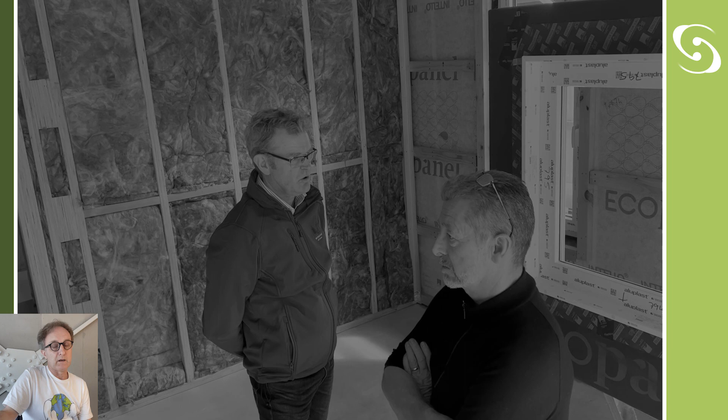The thing about the New Zealand home building industry is that most people decide what sort of home they're going to live in after visiting a building company show home. 80% actually decide what they're going to build. But in actual fact, they're looking at the wrong thing. They're looking at the cheapest possible home that you can build to the New Zealand Building Code standard. In most cases, they're all pretty similar. They might look different on the surface, but in terms of technical performance, they're very similar. And like I said, 95% of homes are built to the code.

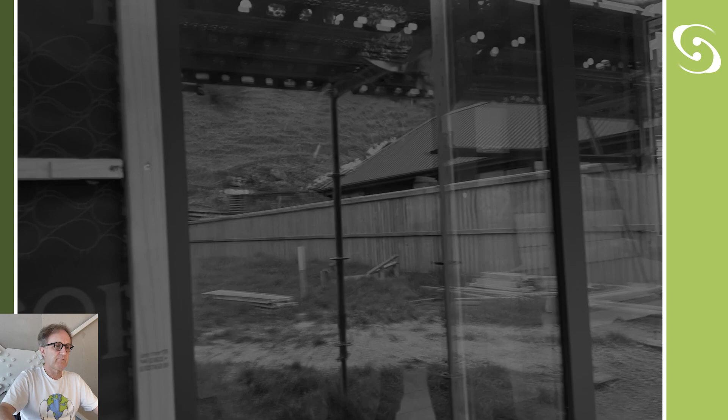So on the tours, people can experience not just the look and feel, they can see how warm the homes are, the air quality, the quality of light, the acoustics, all these things that you just don't get from looking at something on a website. That's the beauty of the tours. They can also hear directly from the homeowners and the people involved in creating the homes, the designers and builders, and ask important questions like the process of creating a super home, what it's like to live in, what's the power bill. People are really open and honest and share all their information about those things and the costs involved in creating a super home.

One thing most people probably initially think is: super home, that sounds really expensive. Supercar, super yacht. But that's not what it's about. It's about raising the standard and shifting the bottom end to something that is healthy as the minimum standard. I'll talk a bit more about our base, better, best standards. If you're on a budget, base is the minimum, and then you can do better or best if you want to go to the next step.

You choose which homes you want to visit and rock up. So there was one year, 2020, we couldn't do the tours because of COVID, but 2021, 2022, we had a different format. It was just back to one weekend, but we still had around 5,000 people. And it just shows how many people are actually interested in doing something different and doing something better. And it's been really super great to get back to having in-person events.

But also there might be different layers, and I think the Japanese call it kyokai, a technique for articulating space and understanding boundaries, and the boundary between the inside and the outside is something that you might want to occasionally blur, and there will be different levels of opacity and transparency. There'll be light and shadow, and a lot more than just how do you keep the weather out of the building.

And I think this design here reflects that a little bit, and this end room was really about how do we create almost like an outdoor room where there's an amazing view here. So that's another thing, you might want to see what's happening, so that the house opens up and closes down in varying degrees. Another interesting thing here is that you've got different layers of shading. So you've got basically a dual eave where you've got a lower overhang to protect this area from overheating, which I think is super important.

And this example here too, it has massive overhangs on the north-facing roof, because we think it's actually relatively easy to make a house warm so that it's not going to be too cold, but it's more difficult to keep it from overheating. So that's a feature of super homes, making sure that you have the right amount of shading.

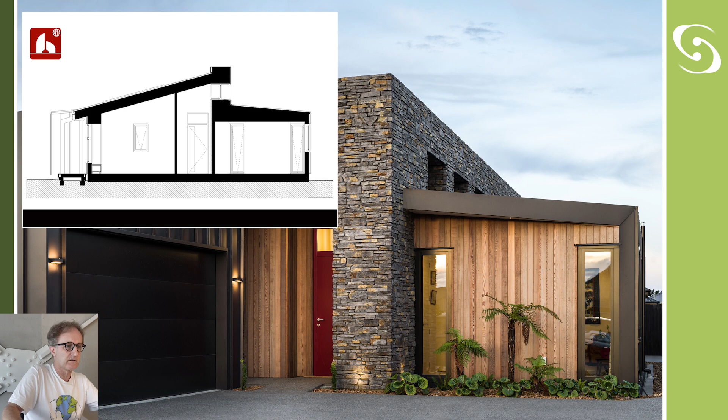house. Every design needs a big idea, and the big idea with this project was this spine wall that separates the public area from the private area. The bedrooms are on one side, and then the kitchen, dining, living, and a multifunction room on the other side.

So a key to the success of this design is a really spatially aware floor plan. It's a really good place to start, thinking about being spatially efficient, because, quality not quantity, if you can create something that's really great that isn't overly large, then you can put more into the quality with the money that you save.

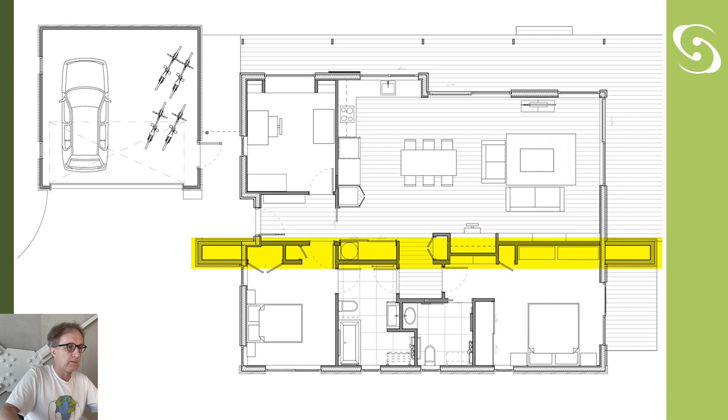So you can see this wall in the middle houses some storage and a little office space, but also it has the whole home ventilation system and the ducting and the hot water cylinder. So we've got our 2 bedrooms, master bedroom, ensuite, and a shared bathroom, and then opening out to the northwest is the living area.

And this is how the cross section works. So you've got these high level windows for ventilation, and there's Jetstream Max insulation in there, so we've packed as much insulation in there as we possibly can. And this house is designed to passive house standard, so it's very airtight. They tested it and it was 0.7 air changes. The requirement for passive house is 0.6, but we think it should be relatively easy to find out where the 0.1 is and retest that.

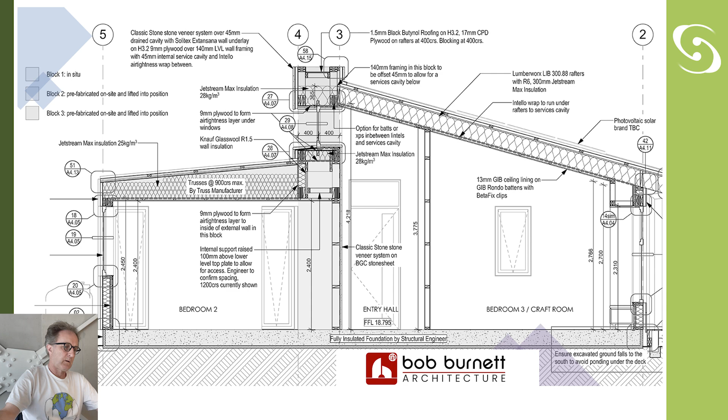So you can see in here the space, and interestingly, I went there to take some photos on the weekend, and the owner commented about the quality of light in this space and how it was really unexpected, and how they really enjoy the morning sun coming in through those high windows and seeing the play of light throughout the day, and are very aware of how the sun moves around throughout the day,

and just generally very aware of the environment and the fact that we rely on the sun and the solar gain from the sun, but also they're collecting their rainwater and recycling the grey water. So even though they're connected to the town supply, the last couple of months, January, February, there's been very little rain, and they're thinking about the resources and living within our boundaries.

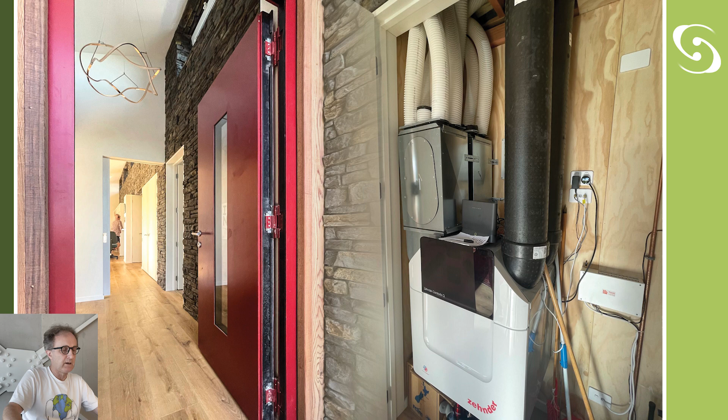So their power bill currently has a $260 credit, and their biggest power bill in winter was $80, but they have an electric car which goes to work every day, and that's part of that. There's a whole home ventilation system in this house, and that's really important if you have an airtight home. It's a package deal, you've got to have that. And that provides a really great quality of air.

So it's got that sort of aesthetic from the exterior, but the interior is something completely different. The interior is very much the Japandi sort of light, bright, minimalist, natural materials. A lot of wood and stone, and once again a very carefully thought out quality of light and shade and protection from the harsh summer sun.

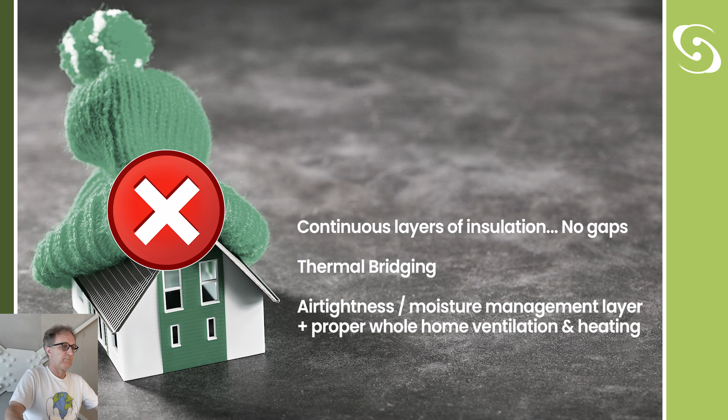And then, if you read the fine print, everybody was sort of freaking out about the thickness of the insulation and how that's going to fit in the roof. But then there's a half a metre gap at the edges that is allowable to still have the old level of insulation, which is half. So it's not really a beanie, it's more like one of these little skull caps that the Pope wears. A yarmulke, I think that's called.

But anyway, air tightness is so important in the New Zealand climate. So, if you think about a high performance home, passive houses live around here. The bottom axis, the x-axis here, is the air tightness, and the space heating demand, which is effectively the energy use, is on the vertical axis. A good standard for a super home is about one air change. 15 kilowatt hours per square metre, that's actually the passive house standard.

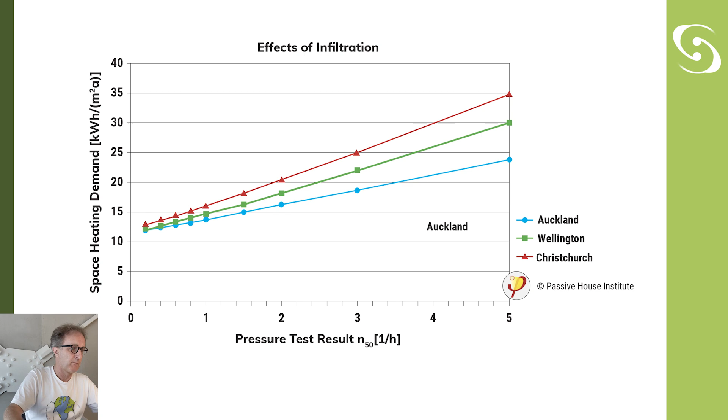And in Christchurch climate, if you look at the red line here, if you go up to 30, which is double the amount of energy, you've got 3 more air changes. So this is showing the incredible importance of air tightness and the effect that has on the thermal performance and the energy use. So just thinking about insulation is really flawed. You really need to think about how that insulation is going to be airtight, and it's going to work much better.

So we have our details for windows, walls, floors, and the key thing with the window is installing it properly into the warm part of the wall. The pink part here is the warm part of the wall, and the blue is the cold cladding cavity. The image on the right is still how, even with the building code changes and improving the standard of the actual windows, they're still able to be installed in the cold cavity, which the rest of the world stopped doing decades ago.

There's obviously quite clever people at MBIE and consulting on this, but it's sort of beyond belief that they can't understand that it's important to have a high performance window installed in line with the insulation in the warm part of the wall. So my view is that if you're spending more on better windows, it's essential actually to get the full advantage of that instead of having them still in the cold part of the wall.

If you do install the windows properly, as per this image here, you can get rid of this big chunky piece of aluminium. It's called a sill support bar, and that's a huge thermal bridge. Aluminium is probably the 4th most conductive material known to man. So even if you do have a thermally broken aluminium window, the bit that's supposed to be in the warm part is still going to be exposed to the cold. So that, in my view, defeats the purpose a lot.

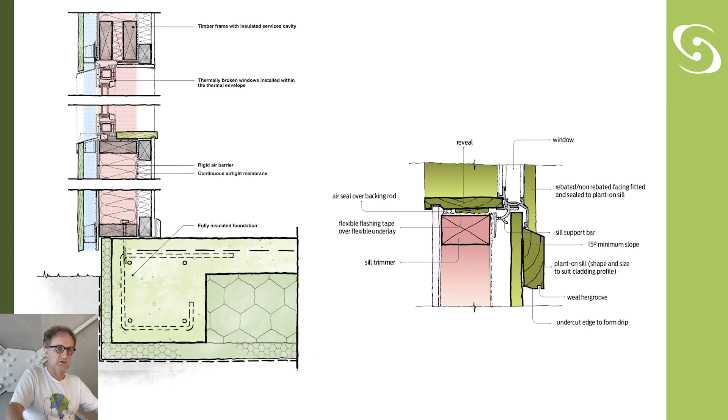Now I think it's really important that we understand the performance of our designs while we're designing them. We've been energy modelling what we do for a couple of decades, and we were early adopters of this. This is a graph from ArchiCAD, which is the CAD program that we use, and it actually has energy analysis built into the program. I've never met anyone that actually uses it. Originally it was an add-on program called EcoDesigner, and back then, 15, 20 years ago, we used that program and explored what it can do inside the CAD package.

So I think modelling a design after it's completed and giving it to a consultant can sometimes be an eye-opener, but by far the best time to get the information about the energy use and the thermal performance of a design is at the very early design stages when you can make changes. There's little point in knowing what the problems are after your client's already fallen in love with a design, and it's hard to come back from that and make changes unless they're really committed to doing that.

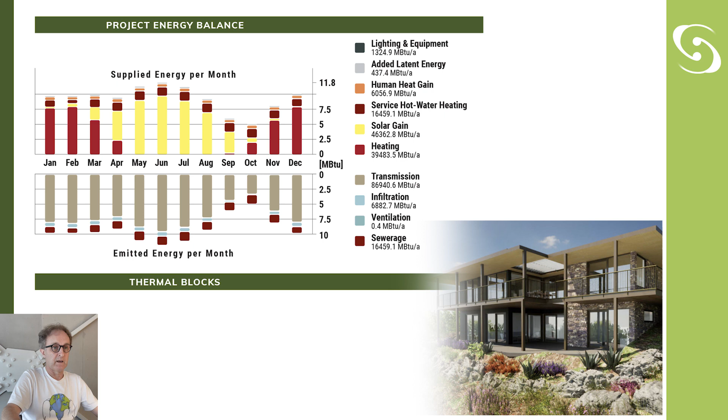So integrating, I think this is the future, integrating the analysis into the workflow so that we've got tools that are allowing us to work smarter, not harder, and have the data at our fingertips when we need it. It's kind of like you could have an energy nerd on your team in your office full time if you had that capability.

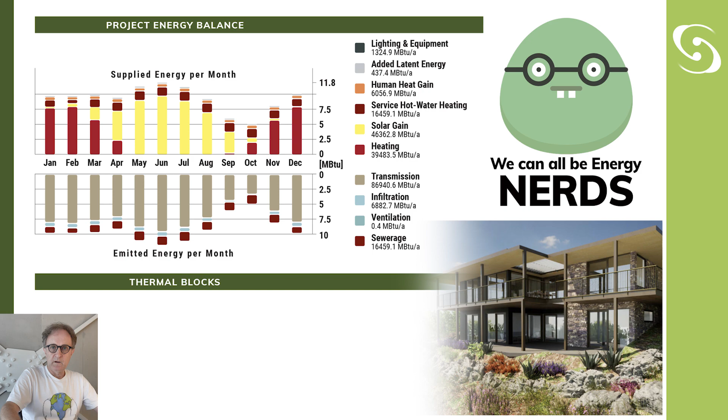So just another thing that, this is pretty old now, and this is an idea that I had quite a long time ago, a super app, and even though we haven't, it's still just an idea. We haven't created this app because we've applied for funding, but it hasn't been picked up. But I think it's really useful as it describes really in essence what a super home is all about.

So this is actually a slice through the first super home, the first 10-star home, and if you can imagine this as an interactive 3D model, and you can make changes. You can put some solar panels on, or increase the number of solar panels, or change the windows from double to triple glazing, etc. And then you can see what the energy consumption is, what the performance is, what the carbon footprint is in terms of the embodied carbon as well.

The financial data, what's the power bill, what's the monthly power bill, and then what's the build cost, and how does that change as you make these iterations and look at exploring these different options. So I think that would be really, really useful.

And then the last piece is what would happen if you put the money that you save, if you had a house like the Whare Paitara house where you had no power bill, it was energy positive over the course of the year. What would happen if you put everything that you spent on your power onto your mortgage? It would have a substantial impact on your financial position. It could reduce the term of the loan from 20 to 15, 10 years maybe. It could save you many, many thousands of dollars depending on the size and cost of the home.

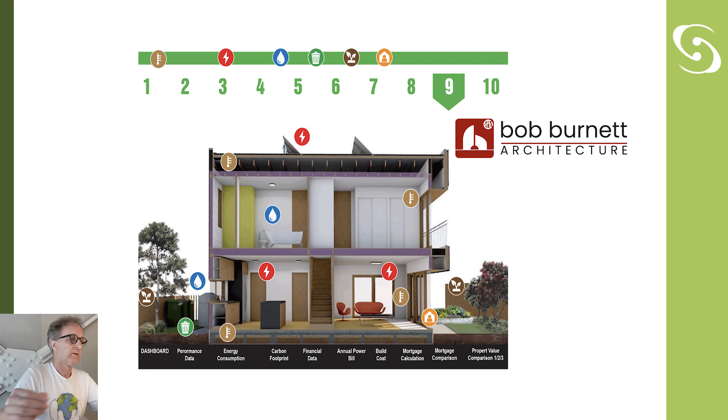And this home here, there was a single story and a 2-story home. We kept this one as our office, and we just sold it about 1.5 years ago, and we were really pleasantly surprised. It reached a much higher price than we expected, probably 20% more than what we were expecting. And a lot of that was due to the real intense interest that people had in the performance of the home and those super home attributes. So you only get that if you sell it, but it's good to know that it's a wise investment long term.

I'll just finish with some of the reading that I'm doing at the moment. I mentioned the one on the right, Hyokai, the Japanese technique for articulating space, and it is fascinating. In a way, reading this is kind of explaining what we've been doing to me. The Japanization of our design. It's almost been like a subliminal thing, because I've spent a bit of time in Japan and I've understood their techniques, and it's quite an eye-opener and quite different.